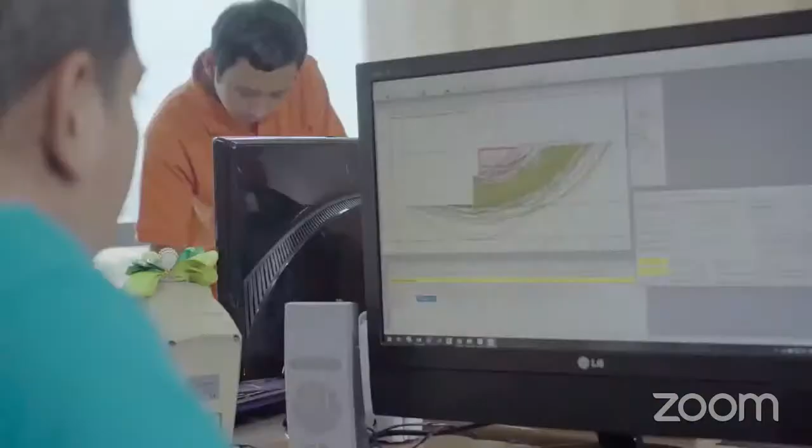Give appreciation to employees by developing their well-being. Create a safe and convenient working environment for career advancement.

Products from PT Multibangun Rekatama Patria include Tensar Stabilization Geogrids and Geogrid Triax. Geogrid Triax has been developed to interlock with aggregate particles in order to create a mechanically stabilized layer within pavements and other traffic areas.

Multi-block retaining wall system combines concrete modular blocks with Tensar uniaxial geogrids to form a specific type of mechanically stabilized earth structure, namely a modular block retaining wall.

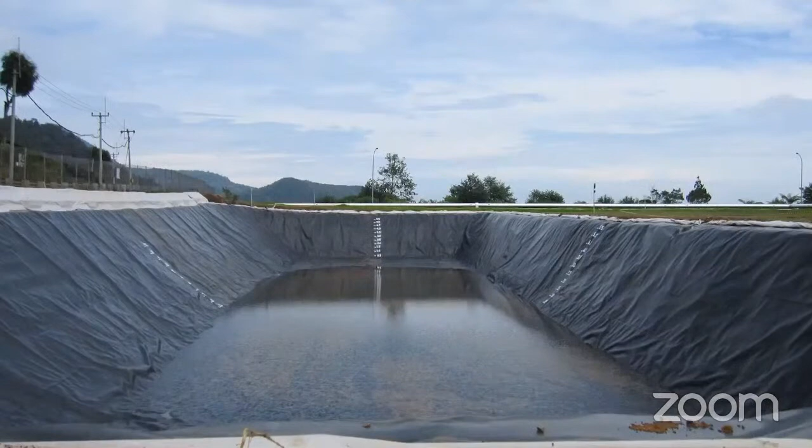Geomembrane. Geomembranes consisting of high-density polyethylene liners are used in many situations where an impermeable barrier is required, especially in extreme environmental conditions. We also provide other geosynthetic products such as geotextiles, drainage materials and composites, as well as geosynthetic clay liners, whichever provides a suitable solution for your project.

The warehouse of PT Multibangun Rekatama Patria is only 5 minutes from the Bitung Tangerang toll gate, which provides easy access for material delivery. The warehouse is located in District Integrated Area Development 2 in Bitung, Tangerang.

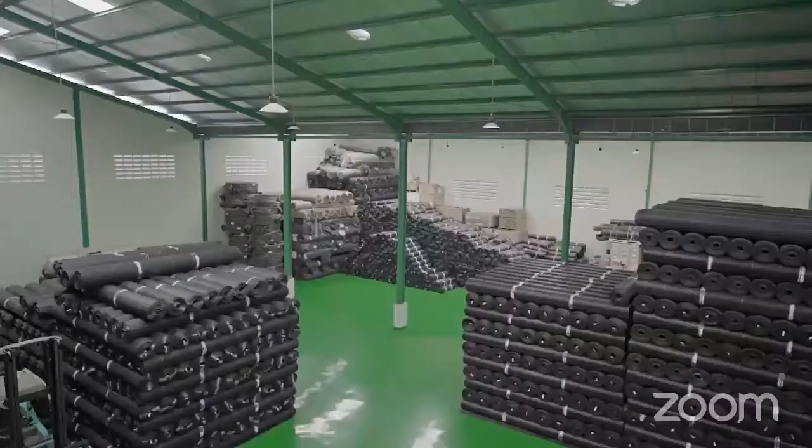It has an area of 3,300 square meters, which can accommodate the geosynthetic material in an organized and structured arrangement, using equipment operated by professional workers.

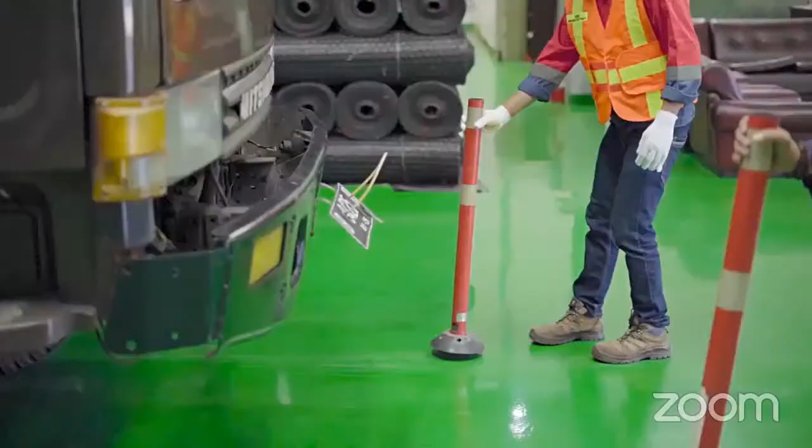We verified that the geosynthetic material quality remains intact until it reaches the project site. There is always ready stock, and professional service is our commitment. To share this professional experience, please do not hesitate to contact our team.

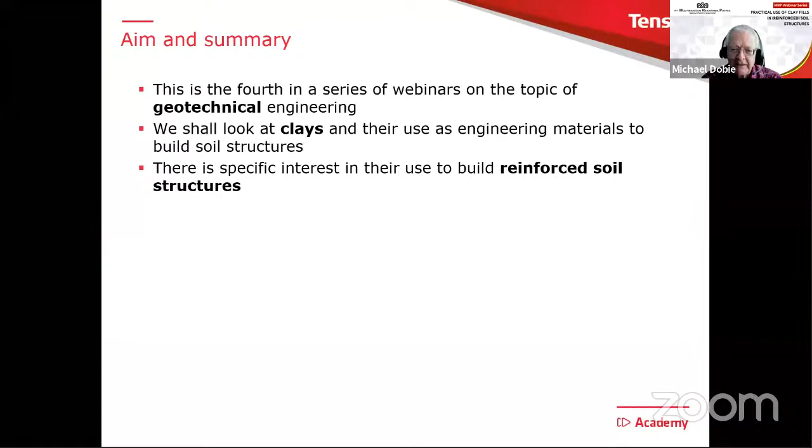This is the fourth webinar in this series, and today I've taken a topic entitled 'The Practical Use of Clay Fills in Soil Structures.' I put reinforced there as well because this is probably our main interest. But the information today could be equally applied to any use of clay fills to build, say, an embankment or a similar structure. So this is the interest today, looking at clays and their use as engineering materials, in particular for reinforced soil structures.

There will be another webinar in this series next month, where we'll have a significant change of topic, and we'll look at the use of CPTs in soft clays. So quite a different topic, and that'll be next month. So there is a list. In the first three of these webinars, we've developed ideas about soil properties in general. We've looked at measuring soil shear strength, and the principle of effective stress. I think looking at clay fills is an obvious continuation of this theme, and that's the reason for this particular topic today.

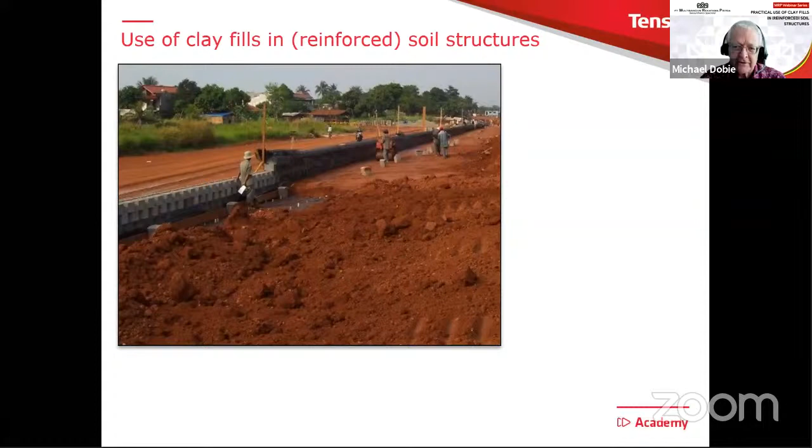So some pictures, some clay fills in action. This is actually construction of part of the Jakarta Outer Ring Road using our well-known Tanah Merah. This is a clay fill of volcanic origin material, and it forms a very good fill. One reason being that it has a predominance of a rather interesting clay mineral called halloysite, which at a microscopic level looks something like this.

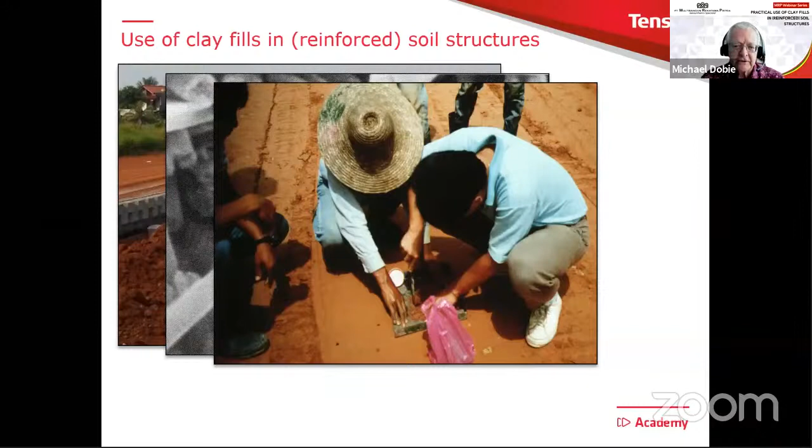But it's not the only kind of clay that gets used for this kind of construction. This is, in fact, using a weathered granite material in Malaysia to build a reinforced soil structure, and here you can see them checking density as they build up the structure.

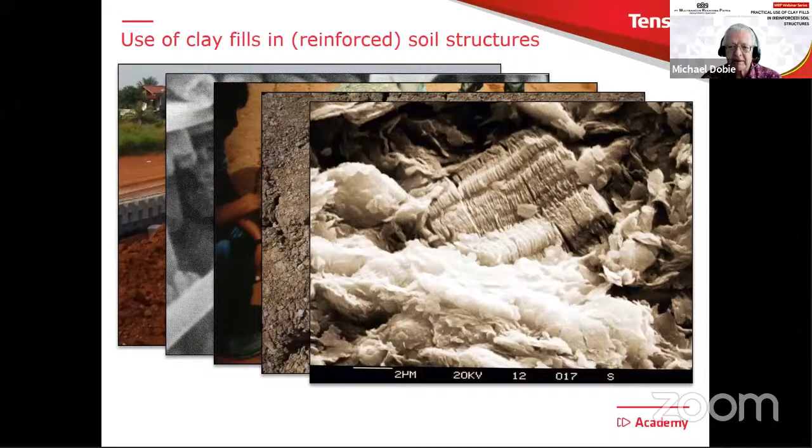What's this intended for, the webinar today?

We're going to talk initially about clay and some soil mechanics aspects of it. Then the main aim is to look at the likely pore water pressure inside a mass of clay fill after you've built it, because this is vital to understanding the appropriate drainage measures you should use when building a structure using a clay fill, whether reinforced or a general embankment.

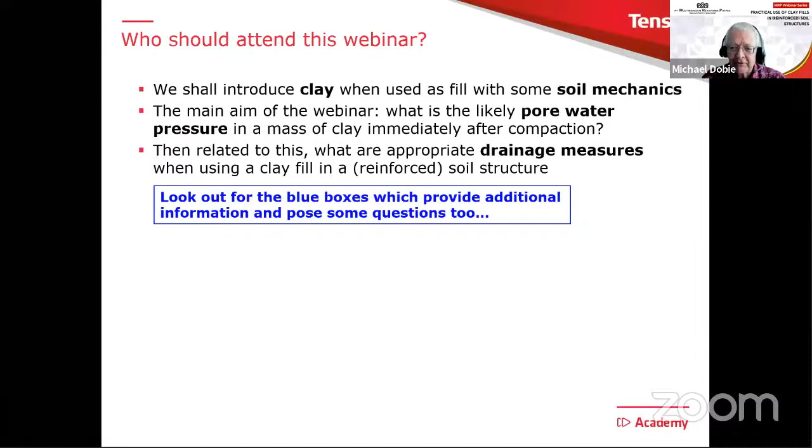This is really intended for civil engineers who have some involvement in ground engineering. That's our main target, but hopefully it will also be of interest to more experienced geotechnical engineers. The main target is reinforced soil applications, but the ideas mentioned here could be useful for a wide range of design applications where we use clay fill or other fine fills.

I also like to mention interesting books or references that could be helpful. There's one here I've had on my bookshelf for a very long time, on the left. This was a clay fills conference held in 1978 by the ICE in London, and it contains a wealth of information about the performance of clay fills. I still make use of the material in this book. No doubt there have been more conferences since then specifically on that topic, but it does contain very good information, some of which I'll be using later in this webinar.

The other book is one of Laurie Wesley's books in Bahasa Indonesia, Mekanika Tanah, the thicker one. Chapter 15 of this book specifically looks into the compaction of fills, in particular clay fills, so that's a very relevant section to today's topic.

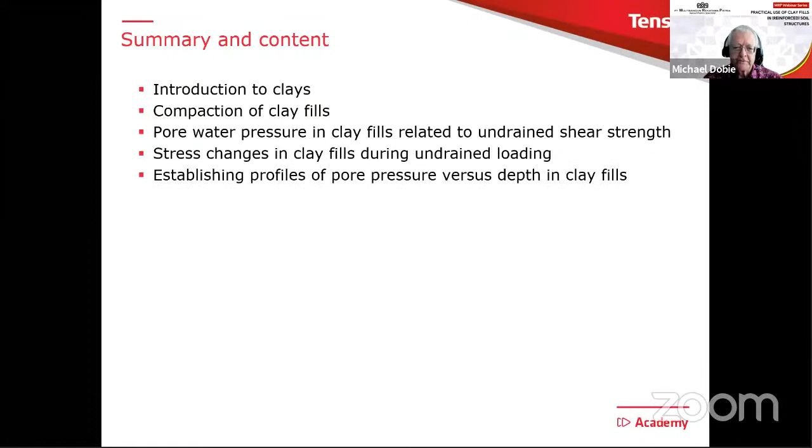So the content will be like this: a brief introduction to clays, then a bit about compaction, and the relationship between pore water pressure and undrained shear strength of a clay. This is rather important. We'll then look at stress changes in clay fills during undrained loading, an important part of the jigsaw puzzle. Then perhaps the main target is establishing profiles of pore pressure in a clay fill versus depth, because this is very useful when you try to visualize what's likely to happen as you build a clay fill and later use it in the longer term.

That will lead to important principles concerning drainage around clay fill structures, and also, just at the end, a rather nice demonstration of what can go wrong in a clay fill structure when the drainage doesn't work as intended.

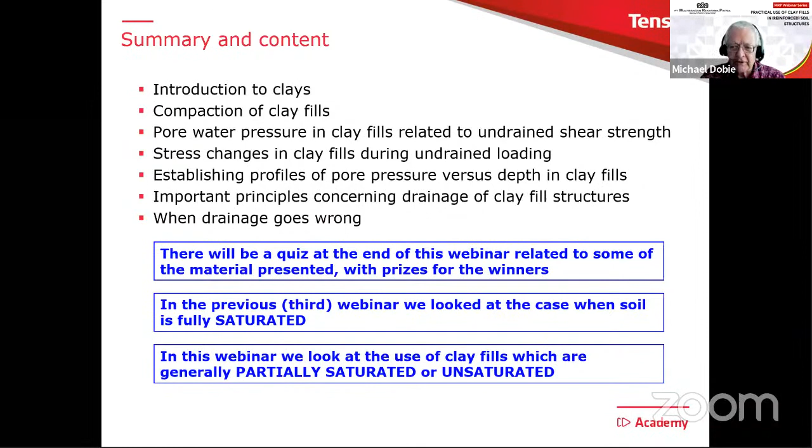Just to make a point, the third webinar we did last month was looking principally at the case of soils which were fully saturated, softer soils maybe, but soils below the water table. The main difference today is that we're now looking at clay fills, which are going to be either of two terms we commonly see: partially saturated or unsaturated. This does give some differences in behavior, and I will touch briefly on that a little bit later on.

Some introductory comments. Another nice electron micrograph of a clay. You can see there a scale bar of just 1 micron. Clay fills have many descriptions: clays, silty clays, sandy clays. But the important point is that these are materials where the mineral content is dominated by clay minerals. Clay minerals are small, generally flake-like, like the ones you can see in that picture.

These materials, especially when compacted to typical earthwork requirements, would have a very low permeability, say 1 × 10⁻¹⁰ meters per second. This is a really small number, sometimes difficult to imagine what it really means. But in the first webinar, I came up with a different way of understanding permeability. That particular permeability would mean that if you watched a particle of water traveling through 1 meter of clay under a gradient of 1, it would take 320 years. So water through a well-compacted clay travels extremely slowly.

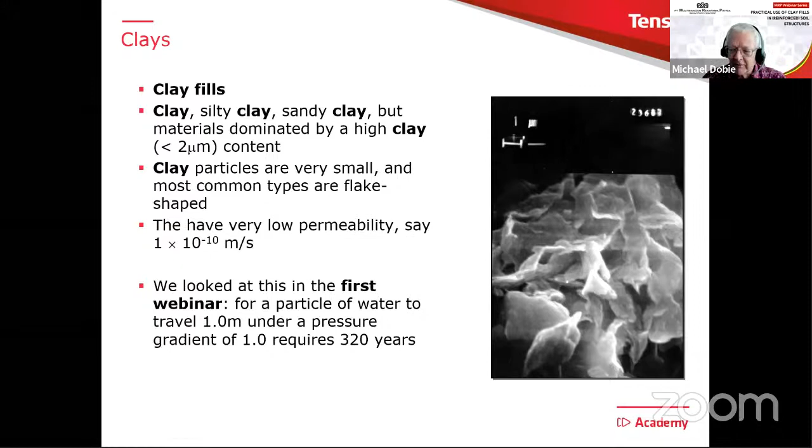Another good starting point when looking at clays and considering using one as fill would be to look at its Atterberg limits and plot them on the famous Casagrande or plasticity chart, where we plot plasticity index, the PI, against the liquid limit. This is a really useful diagram. We have a famous line called the A line, the thick inclined red line going up there, which also matches closely to the AASHTO designations of different soil types.

But what would be the important targets for clay fills? You would want them certainly on or preferably below the A line. As you go higher above the A line, you tend to get into soils more susceptible to changes in moisture content — more swelling, more shrinkage, as we saw earlier in that picture of the very cracked soil. So preferably below the A line.

However, especially with clay fills, local knowledge and experience is really important. That is something to take into account without a doubt when considering using a clay fill in a project, particularly if you're not so familiar with that area. Try to obtain some local knowledge about using the finer soils as fills.

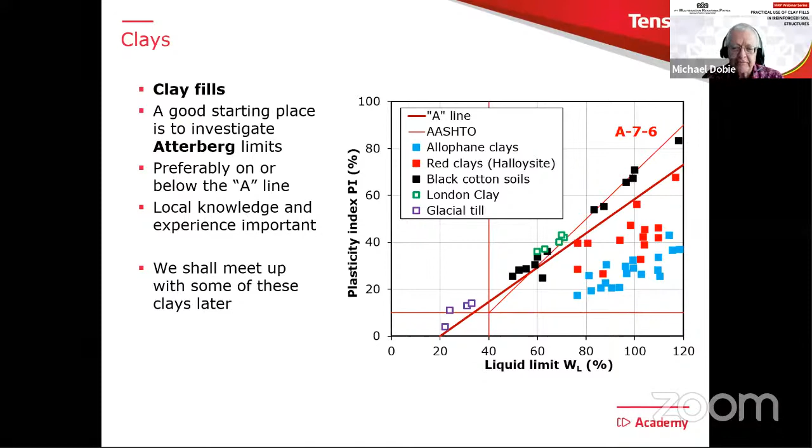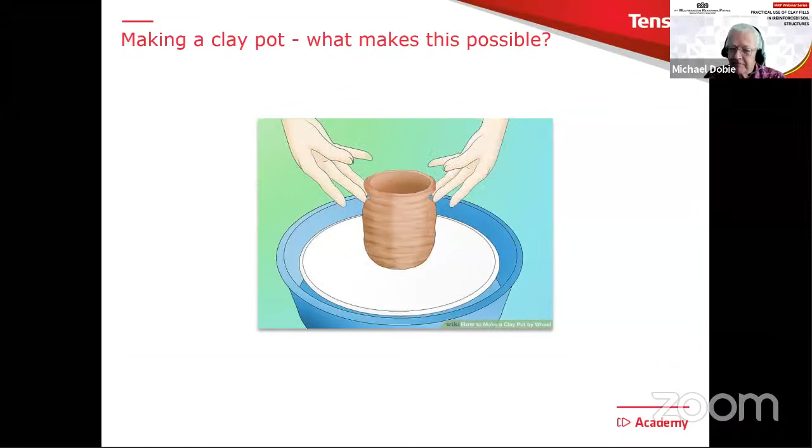So a bit of a change of view for a minute — think about something different, because I don't know if anyone listening today has ever had a chance to make a clay pot. Maybe something you did at school, but it's fun. What do you do to make a clay pot? You start with a big lump of clay, knead it into a ball, and place it on a wheel which you can spin. In the good old days you'd do it with your feet, but probably now it's electric. This would spin, and you could use your hands to create a shape as it spins round and round, maybe even create a hollow in the middle to turn it into a pot. Then perhaps make a nice shape at the top and end up with your pot, which you then remove. And of course, you then put it into a kiln.

I think probably the answer to this is much the same as the answer to the next question, because the next question will now move to civil engineering and look at a case like this where we have a construction site and that's a clay fill. It's actually in the west of Java. You can see that this clay fill is supporting extremely heavy compaction plant. Well, how can it do that? There must be something going on that allows it to do that.

So I thought it would be useful to do a bit of soil mechanics at this stage. During the last webinar, I set a bit of a challenge to see if people could derive a particular relationship where we can predict the undrained shear strength based on the drained strength properties, or the effective stress properties.

C' and phi', which we have to do by using the geometry of the Mohr diagram. If we do this, we end up with this expression where you can see undrained shear strength on the left equals quite a number of terms, but they're all very familiar. You need to know two things here to use it, K0 and AF. AF is the Skempton pore pressure parameter relating change in water pressure to change in shear stress.

And the challenge was, can you derive this from first principles? I'm pleased to say, yes, James Oetomo did this. He sent in his derivation, and it was perfectly correct. He received as a prize the book Mekanika Tanah by Laurie Wesley. That was the shorter book. Congratulations to James on doing that.

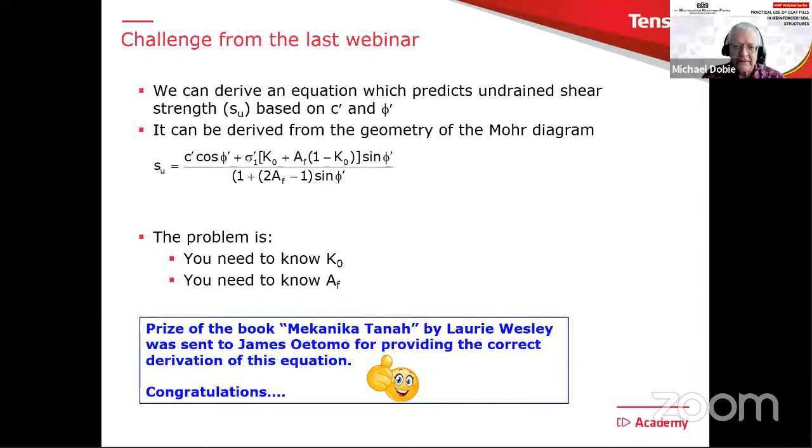But I want to use that expression now. So what I'm going to do is go back to our site and consider a depth, say 0.2 of a meter below that very heavy vehicle or that very heavy plant. Let's assume for the time being that our water table, or phreatic surface, is actually at ground level, which means the clay would be saturated. With all that information, and making some assumptions about the soil properties, typical clay properties, I'm assuming a K0 of 1 and an AF of 0, which would probably be quite reasonable for that material we saw just now.

If I put all of that information into that expression, then the undrained shear strength comes out at 5 kilopascals. Now, if you're familiar with what those numbers mean, you'll know that's an extremely soft clay. Almost certainly you could not walk on it, and certainly if you tried to place and compact a clay with an undrained shear strength of 5 kilopascals, it would not be possible.

So perhaps to understand this better, let's now turn to typical compaction requirements that we might be using, especially when it comes to using clay fills. The normal starting point is a compaction curve. This is something we normally derive from doing what's called the Proctor test, and we develop a relationship between dry density of a soil and its water content for a particular amount of compactive effort. The red line would be the result, a series of plotted points.

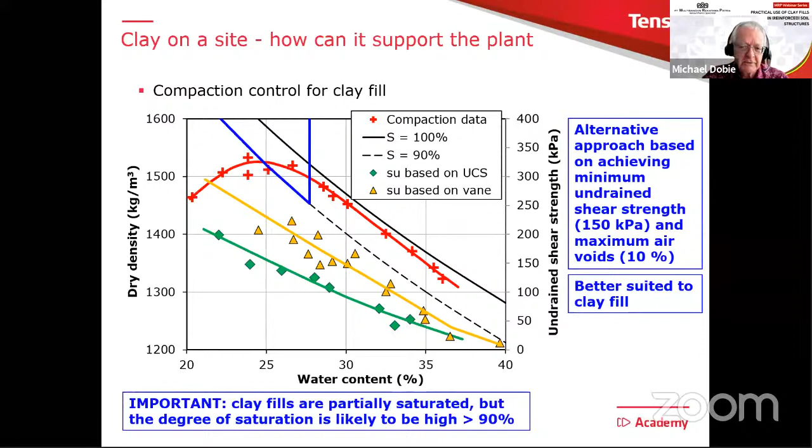So what I want to do now is to take that concept of partial saturation and see how a material behaves when we load it in the undrained condition.

But before we get there, I'm just going to go back a little bit to the third webinar from last month, because I went through this procedure for a saturated soil. If you attended that webinar, we looked at a case where we have a soil element below a water table underneath an embankment.

We wanted to understand what happens when we apply a total stress to that soil element without drainage taking place. The way I did this was to isolate the little element and have a very close look at it like this. To make it a bit easier, we enlarged it like that, and then looked inside this element to try to understand what would go on.

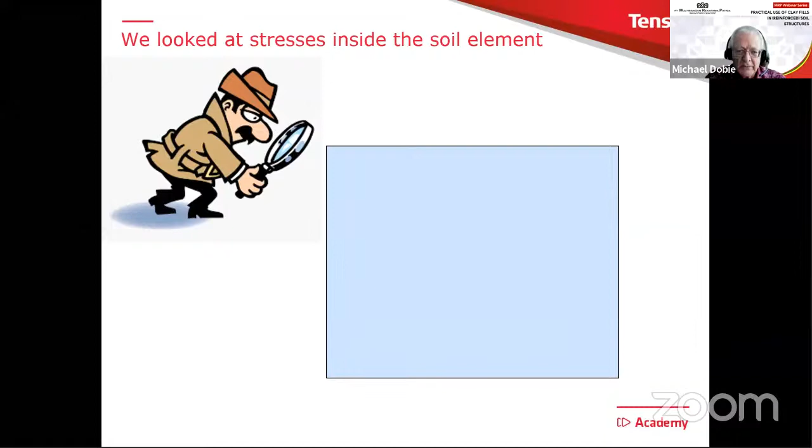Now, it was quite a long description, so I've just taken part of it. What we're looking at here is a box, and in this box, the top can move up and down. The brown lumps are the soil particles, and of course, the blue is the pore water. If it's fully saturated, then it's all blue.

And we then looked at the case of applying a load to it. Before I get there, just to mention, we also have on the right-hand side a gauge to measure pore pressure, the U, and we also have a tap. Today we're going to keep the tap closed because we only want to look at undrained behavior. So if the tap is closed and nothing can leave the system, then this would be the undrained condition.

Above the box, I've written the principal effective stress equation, saying that total stress equals a combination of the effective stress, that's the intergranular stress, plus the pore pressure, that's the pressure within the pore spaces, in this case in the water. So we're going to apply a load, sigma, on the top, or a stress.

And then the question is, well, what happens when we do that? We need to restrain the sides to prevent the box from breaking open, so we apply K times sigma there.

And then the question we asked, this is the same as last month, is if we do this, then what's U? What is delta V, that's the change in volume? And what is K, that's the proportion of sigma required to prevent the box from splitting open?

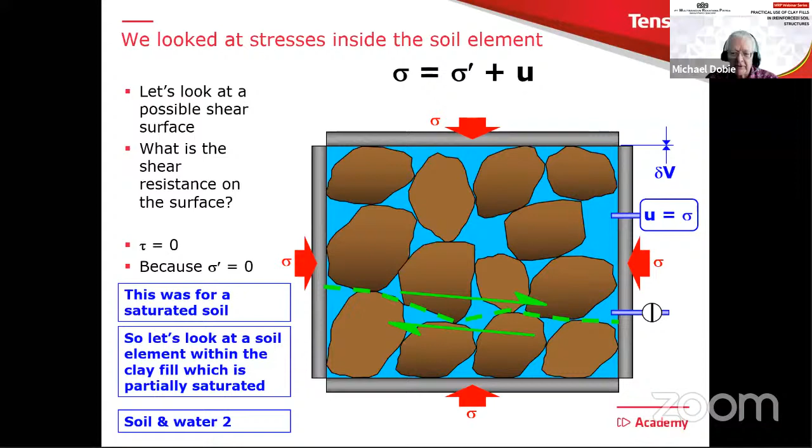Okay, so now let's leave that discussion behind, because that was for saturated soil, and move on to today's topic. What we want to do now is look at the soil element, in this case the clay fill, which is partially saturated. So if we go back to our picture, we're now interested in the particle of clay, or that element of clay inside the clay fill embankment, which we know is going to be partially saturated.

So again, we'll isolate it and have a close look at it. Before we add the soil, let's think about what happens to the pore fluid itself. I'm going to take my test box and fill it up with water, but this water has air bubbles in it. That's the little white things, they're air bubbles. And because of the presence of the air, I'm going to call it a fluid now because it's a combination of a liquid and an air bubble. So it makes the fluid compressible, which means that delta V over sigma is going to be something greater than 0, whereas in the saturated case it would have been incompressible.

So I'm going to apply a stress. I'm going to have to hold the box at the sides to prevent it from splitting open again. And the question again is, when I do this, what is U, what's delta V, and what is K in this particular case? And the answers are going to be like this: U will again be equal to sigma. But delta V, if I just do it again, you see delta V is something greater than 0 now because the system is compressible. And K will again be equal to 1.

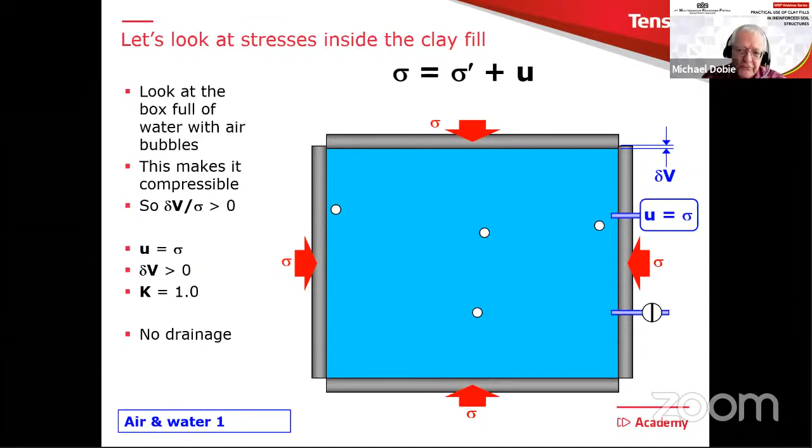And just to remind you, in this case we're still looking at the situation of no drainage. So this means that we now have a pore fluid which is compressible. One thing also to note about this system is that when we get that reduction in the volume of the air bubbles, it's partly caused by air going into solution. And if we increase the pressure more and more, then more and more of the air dissolves. And in fact, eventually, if we go to a very high pressure, the air dissolves completely. In other words, it's no longer present as free air, and we then return to the fully saturated condition. That would be at high pressures.

So I'm now going to put the whole system together. We now have the three elements of the soil: we have the solid particles, which are incompressible, but the soil skeleton itself, that's the assembly of soil particles, is compressible. And so now is the pore fluid, which is compressible because it's a combination of water and air bubbles. Now, at the moment, with no shear, no normal stress applied, no external stress, what's the shear resistance here? Well, of course, it's currently 0 because there is no stress being applied.

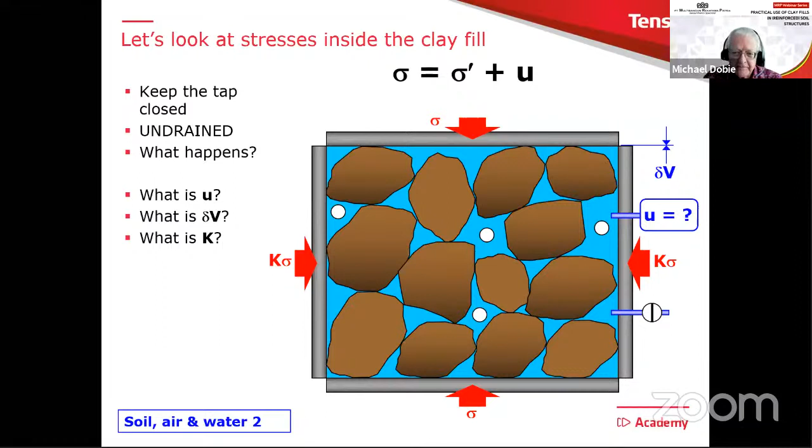So we're now going to repeat what we did for the saturated case. We're going to apply sigma, remembering all the time that this is undrained. I'm never going to open the tap in this discussion today. So it's undrained and we apply sigma. Question is, what happens? We have to hold in the sides of the boxes. What is U? What's delta V? And what is K? And also, what is the effective stress? The answers are going to be like this.

Now, as I allow that sigma to be applied, I'll do it one more time, you will see that there is a small reduction in volume. That's happened because we have a compressible soil skeleton and a compressible pore fluid. Because they're both compressible, the whole thing can compress, even though it's undrained. You'll also notice I made the little air bubbles become smaller. This means that U is now going to be something greater than 0, but less than sigma. Delta V will be something greater than 0. K is going to be K, it'll depend on the soil properties.

We see that there is a small effective stress generated because there is compression of the soil skeleton. Then sigma dashed is something greater than zero. And of course, the important principal effective stress equation says that the effective stress is the total stress minus U. This means that if we look at that possible shear surface, we find that there is resistance developed there.

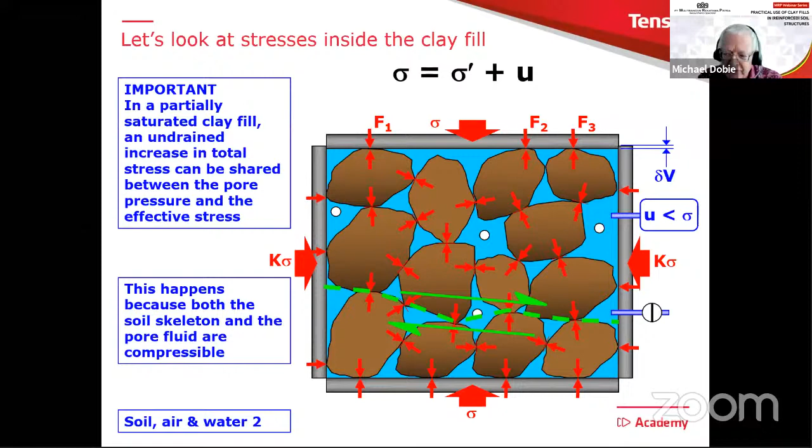So the shear resistance created by the undrained increase in external total stress happens because the effective stress is greater than zero. An important conclusion from this is that in partially saturated clay fill, an undrained increase in total stress can be shared between the pore pressure and the effective stress. This happens because both the soil skeleton and the pore fluid are compressible, and this is an important difference compared to saturated soils.

Now I want to get another clue towards looking at the relationship between undrained shear strength and the pore pressure in the soil sample. To do this, I'm going to look at an unconfined compression test. This is a very simple test - I'm sure you're all familiar with it. You simply put your sample of clay into a machine and load it until it fails.

What's nice about this test is that the piece of soil you can see there in the machine could just be a lump of soil ready to be compacted into your project, into your clay fill. I'm going to look at some results published in a very famous paper by Bishop and Bjerrum in 1960, where they present results from an unconfined test on remolded London clay with the properties you can see there. And here's the result.

So we have strain in the horizontal direction, and the green dots show the increase in deviator stress until the sample fails. It fails at about 68 kilopascals, so that means the undrained shear strength is half of that, about 34.

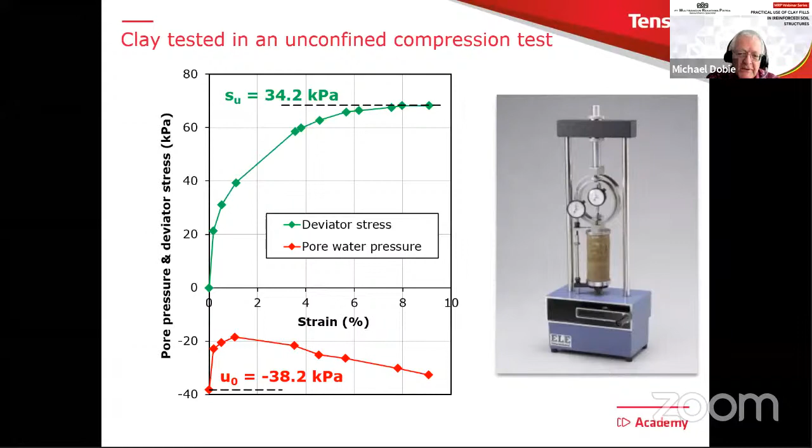But what's also rather nice in this test is that they arranged it almost certainly inside a full triaxial apparatus, so that they could also measure the pore pressure. When we look at the pore pressure response, we see that it starts off at almost minus 40 kilopascals. It then becomes a bit higher, and then it drops off again. So we can see that the pore pressure inside that sample is negative.

So although the clay is soft, with undrained shear strength only 34 kilopascals, in order to create that undrained shear strength it was necessary for there to be an initial pore pressure of minus 38.2 kilopascals - that is to say, a suction. That suction was required to create that particular undrained shear strength. So even though the clay is soft, it's in a state of suction.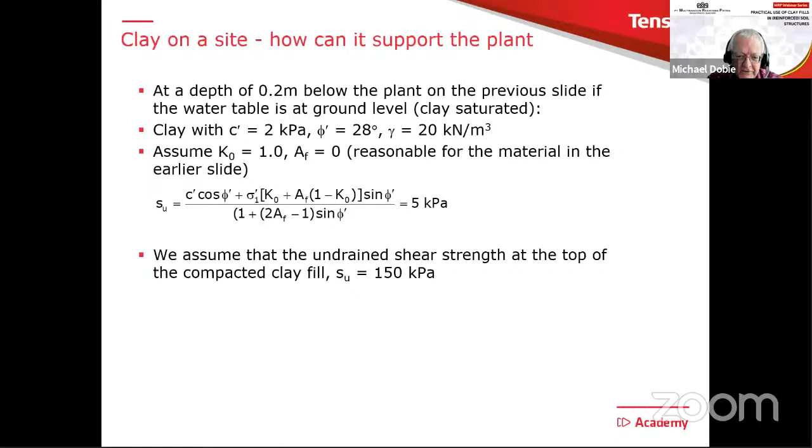So what I'm going to do now is use my formula, and I want to get SU, undrained shear strength, to become 150 kilopascals. To do that, if you look at that formula, everything is fixed except the effective stress, sigma 1 dash - that's the vertical effective stress at that point in the clay. The total stress is also fixed; at that depth the total stress is 4 kilopascals. Therefore, the only thing that can be changed to reach that undrained shear strength is the pore pressure.

And in fact, we need to make the pore pressure minus 162 kilopascals to achieve that undrained shear strength. In other words, it's a very high suction, and that's what's going to be present in that clay. That's the reason why that clay can hold up that very heavy machine, because of this high suction. It's also the reason why the potter can make his pots.

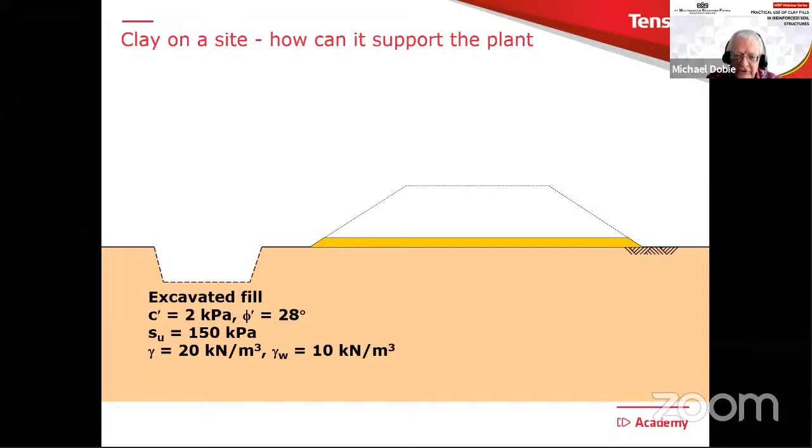So if we try and imagine what's going on at that site: there is our initial situation, and we're going to excavate the fill from a borrow pit. We have those properties we mentioned earlier on. So we dig it out and we start to place it, and we run a compactor up and down there, and we look at that particular element just now.

What we found was that it had a total vertical overburden stress of 4 kilopascals at 0.2 of a meter, and the pore pressure was minus 162, which is a suction. So that was when we first placed that layer.

What happens as we build up the fill higher and higher? We're going to build this fill to something over 10 meters. In doing that, there will probably be a bit of an increase in the undrained shear strength for the reasons I mentioned, so maybe it's a bit higher than 150 now.

In this situation, I can use our formula again to look at the stresses and pore pressure in that element. The total overburden stress is now 204 kilopascals because it's 10.2 meters high, and we find that the pore pressure has just become positive, at 21 kilopascals. So you can see how the pore pressure has changed due to the undrained application of the load above the soil element.

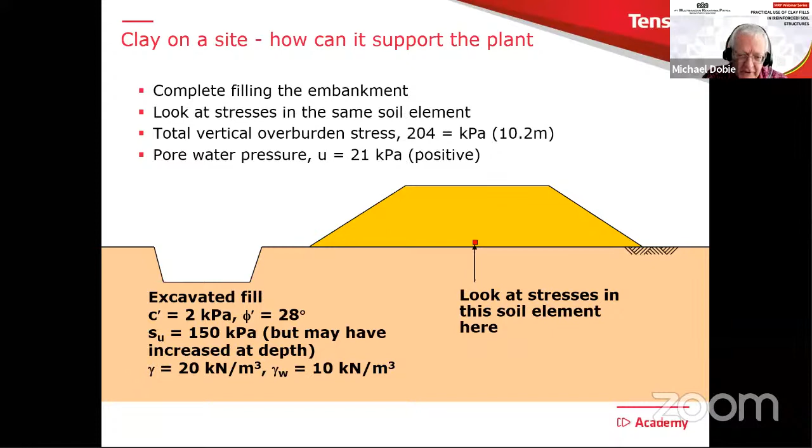A nice way to summarize this kind of data is on a diagram like this, where we plot the pore water pressure along the horizontal axis, with 0 in the middle going negative to the left and positive to the right. The vertical axis is the total vertical stress, which we can calculate as the height times the unit weight.

If we assume a unit weight of around 20 kilonewtons per cubic meter for well-compacted clay, we can add an axis, and we can also calculate a pore pressure ratio, RU, which is simply the ratio of pore pressure to total vertical stress. I can plot lines of RU value like this, and you can see RU is positive on the right-hand side, while because pore pressure is negative on the left, the RU values go negative there.

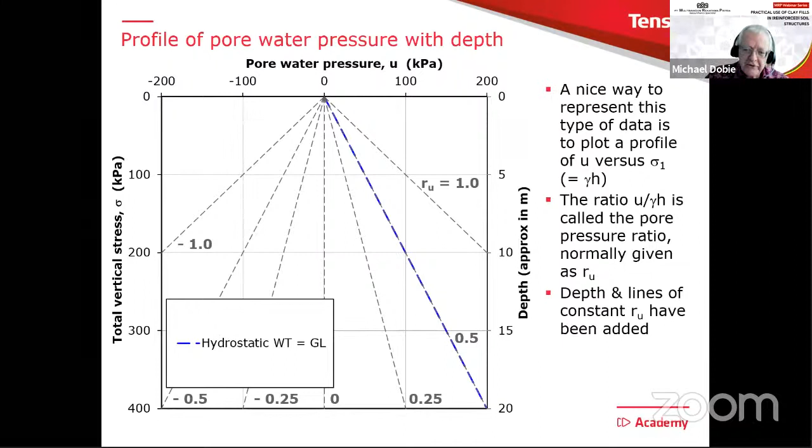The thick blue dotted line would be a typical value of RU when we have a hydrostatic water table condition, in other words the water table at ground level, which we assumed at the beginning of our exercise.

So now I'll add the two dots we just calculated. The red one was when we first compacted the clay fill, and the blue dot is when the fill reaches a height of 10.5 meters. You can see how we've just gone into positive pore pressure at the blue dot, as we calculated just now.

I can also add my original calculation where I found that very low undrained shear strength - that's the purple dot up near the 0. And I can add the data from the Bishop and Bjerrum test, which is the green dot.

I can also add to this diagram the undrained shear strength applying in each of those cases. What you can see is that at very shallow depth, as you move to the left on this diagram - in other words as your suction becomes higher and higher - your undrained shear strength also becomes higher. That's what we'd expect to see when compacting a clay fill.

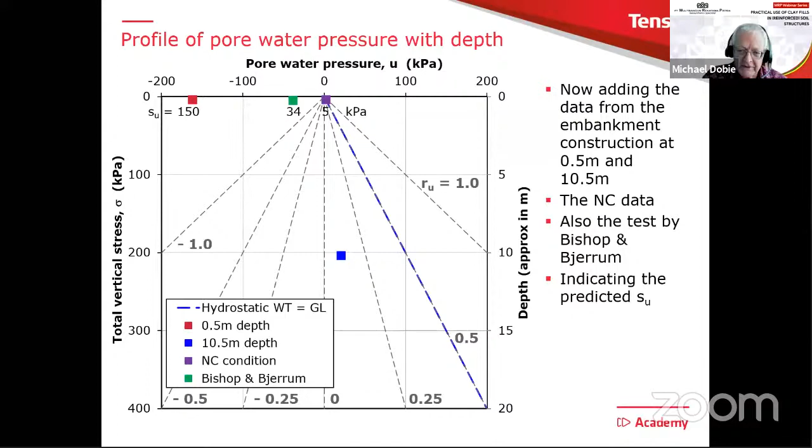Now that was a bit theoretical, so I want to look at some real data using that same diagram, reminding ourselves that clays are partially saturated. I'll show you just a small sample, mainly from that clay fills conference I published in 1978, but you can find lots more data of this type - some laboratory testing and some measurements from site.

Same diagram, so I don't need to explain that again, but in this case those four lines are all derived from laboratory testing on a UK clay called the Lias clay, which is a reasonably plastic clay. A number of samples have been recompacted to achieve a certain undrained shear strength in the laboratory, and then a test is done to look at the relationship between the vertical stress and the pore pressure - you can see the nature of that curve.

The curve is heading up, so if you imagine going down to very, very small total vertical stresses, you would get very high suctions in those samples. We also see that generally, as the undrained shear strength increases at any particular total vertical stress, the pore pressure reduces.

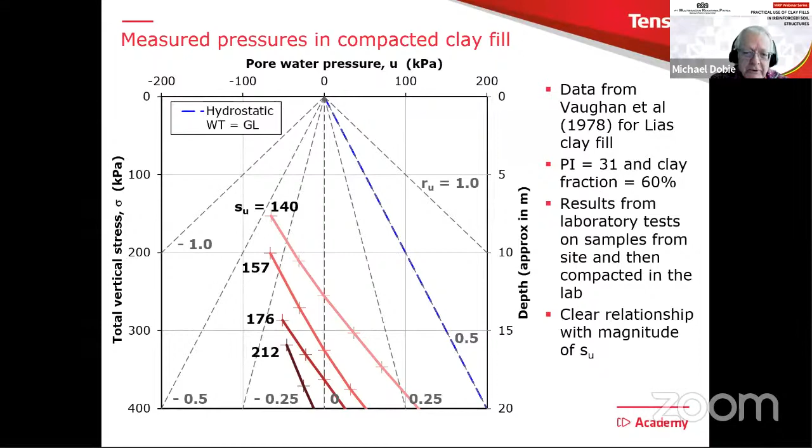The last of these examples is a highway embankment, a very typical one, 12 meters high, again in the UK, built from London clay, quite plastic. Unfortunately, in this case, the undrained shear strength was not reported, but the clay was generally placed on the wet side. So perhaps the undrained shear strength is lower than the 150 kilopascals we identified earlier on.

This picture is a very good demonstration of what's going to happen in a moderately high fill, in this case built with a slightly wet clay, when it comes to pore pressure and its change with time. So if I plot that information for end of construction on this diagram, it'll look like that. Again you see that basic trend: as your total vertical stress becomes smaller, your pore water pressure becomes more and more negative. That's the same trend of behavior we've seen earlier on.

So to summarize in this picture, there is our 12-meter high clay fill. The upper two-thirds is in a state of suction, and the lower one-third has a positive pore pressure because of the effect of undrained loading of that clay. And of course, that is dissipating towards the basal drain. So later on, when we talk about the importance of drainage when using clay fills, this is a very useful diagram to remember, because you need to take that into account when planning and designing drainage systems for clay fills.

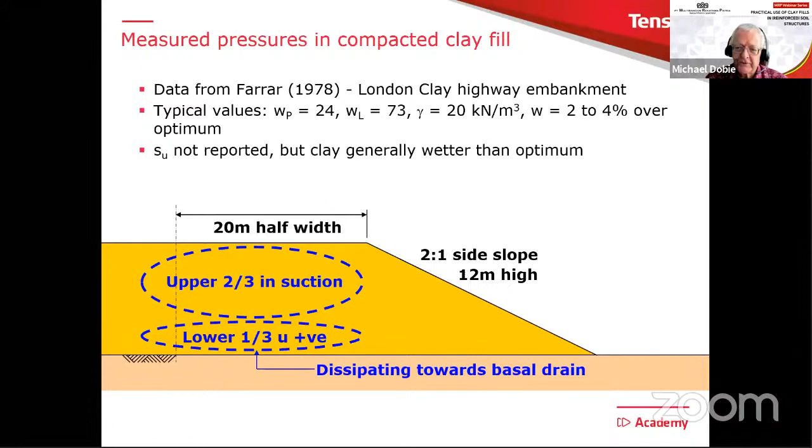So what are the conclusions so far? We have seen that a well-compacted clay fill, certainly to typical highway specifications, is likely to be in a state of suction to a considerable height, say at least 10, maybe 12 meters. In that last case, the clay was rather on the wet side, according to the paper. And it's only going to be at the base of high fills, in excess of those values, that you're likely to get generation of positive pore pressures.

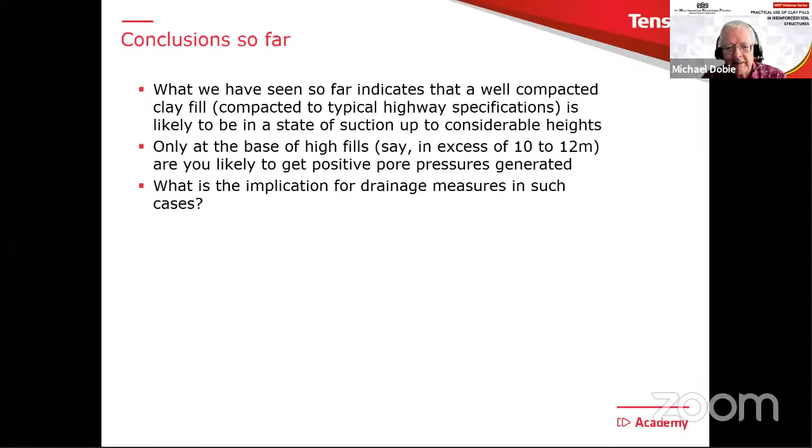So what's the implication of this when it comes to drainage measures? This is really perhaps the main target of this talk today: how you would go about designing or laying out drainage when you're using a clay fill.

So to do this, I'm going to introduce you to a gentleman here whose name is Clay. In fact, here in Indonesia, we'll call him Pak Clay, all right? This guy, Pak Clay, is in a permanent state of suction. You can see him there - he's got this drinking straw, and whenever you put Pak Clay's straw into free water, the water will travel from where it is into the clay, in any direction - uphill, downhill, any direction - because clay is always in a state of suction. And he prefers to be that way, because once the water goes into the clay, he will swell and soften. He doesn't want to do that - he doesn't like swelling and softening.

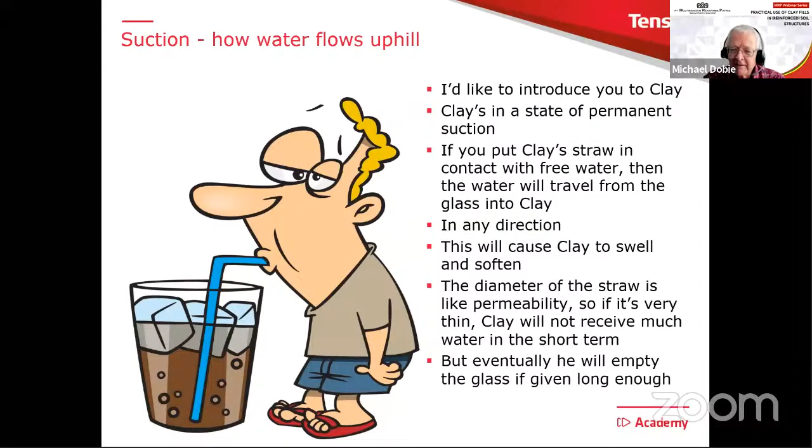He wants to remain in his state of high suction. The diameter of the straw matters because it's like permeability. If the straw is very thin, then in the short term, clay won't receive much water, but he will still receive some. And if we leave it there long enough, it would eventually empty the glass. That's a bit like the situation when we're trying to plan drainage in contact with clay fills.

So we have a little message coming from clay here. He says, look, based on this, please could you minimize my exposure to free water, because I don't like it. That's what is worth thinking about when we talk about drainage.

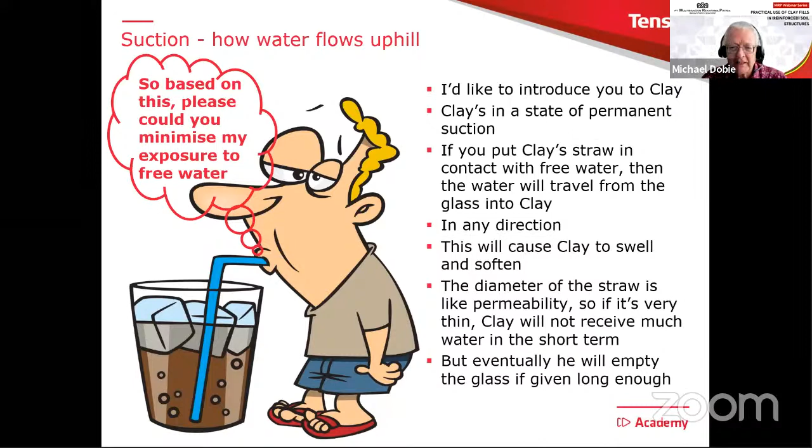Now let's look at the same cross section and correct the errors. First, we'd like to have a nice big drain adequate to carry any likely surface water flows. We seal the facing drain, the granular layer behind the modular blocks, from the surface. We don't want surface water running into that drain.

We want to have high-strength mechanical connections, just in case there is some swelling, so it can be resisted by the connection. And the basal drain is far more effective if placed at a level where it can easily drain to the outside, into say a drain at the toe. You can even consider putting in slotted pipes, maybe wrapped in a geotextile, to help encourage that drain to remain empty. These details are really quite important when it comes to drainage for clay fills.

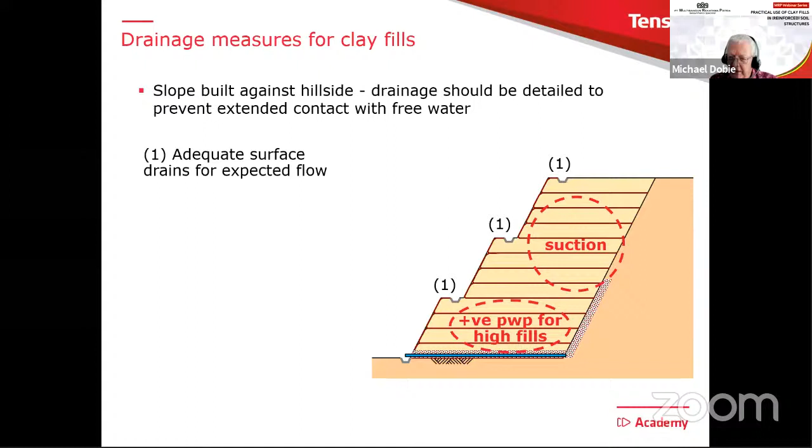If we look at a more general case of perhaps a higher fill built up against a hillside where there might be some internal water flows, the principles are much the same, but there are a few other things to think about. We expect the upper part of that fill to be in a state of suction, and the lower part could become positive if the fill is very high. We might also have some internal flows. But the first thing is we want to design surface water drainage adequate to intercept any surface water flows, with crossfalls and so forth, to make sure water is taken away and doesn't stand there for long periods, which would otherwise infiltrate the clay fill.

If you have internal water flows, it's best to intercept them with a gravel drain at the back and base of the reinforced soil structure. That would be a very important detail, again possibly with an exit pipe to make sure that drainage layer remains empty.

Also, when you have a gravel drain at the back of the reinforced soil block or compacted fill, it should not daylight. It's a common mistake you'll see - people often put these drains coming out at the top. If you do that, surface water can nicely run down that drain and come out at the bottom, giving another big potential for the clay fill to absorb water and soften, which you don't want to happen.

Also important that internal drains should be arranged to remain empty. You don't want them sitting there full of water. Just remember our friend Clay and what he asked - he said please don't put me in contact in the long term with free water. So these are some of the principles which I feel are very important when designing drainage in conjunction with clay fills.

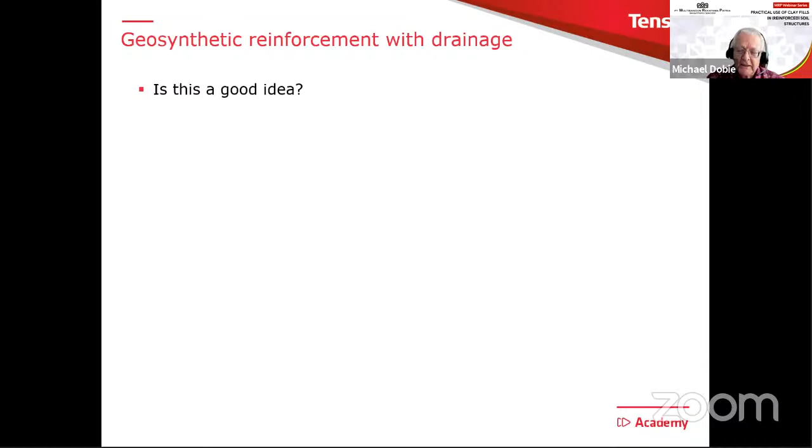Now, there are forms of geosynthetic which combine reinforcement and drainage. Is this a good idea? I'd have to say, as with any engineering material and decision, it depends on the design situation.

But in a simple way, if a mass of clay is in a state of suction, then the only possible result of including thin drainage layers throughout that clay would be to provide a path for water to enter the fill. And if it did that, this could cause swelling and softening. It's something I often ask people to think about - remember that when you create a drainage detail designed to let water out of a system, if things go wrong, it could let water go into the system, which you don't want. So just think carefully about that.

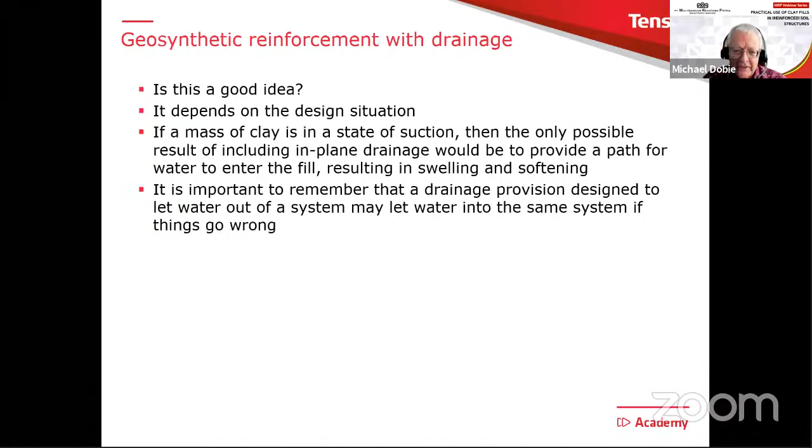The last thing I'm going to cover today is an example from a project in the UK on the London orbital motorway, the M25, where an interesting failure took place. Let's try to understand what happened. I was actually involved in investigating this failure, so I had some first-hand experience, and the photographs we're going to see were taken by me at the time.

There is a very detailed report about this published a long time ago in the proceedings of the ICE, and particularly important, there was an extensive discussion. If you really want to learn a lot about this, the discussion is probably almost more important than the original paper - it was 24 pages of it. Very important document. The failure occurred in June of 1981.

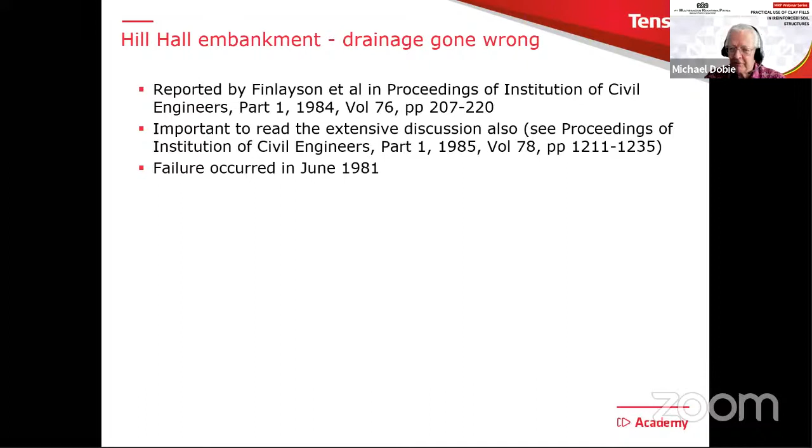I've already mentioned it was on the M25. There, without a doubt, there were some very important lessons learned, especially concerning drainage blankets and the importance of avoiding creating a water source in contact with a compacted clay fill. Just think about our friend clay again, our compacted clay. So let's have a look and see what happened.

The site was like this - we're looking along the center line of the highway. In this particular part of the site, there was a slight crossfall from left to right. So what they did, they placed the drainage blanket directly on top of the topsoil and the grass.

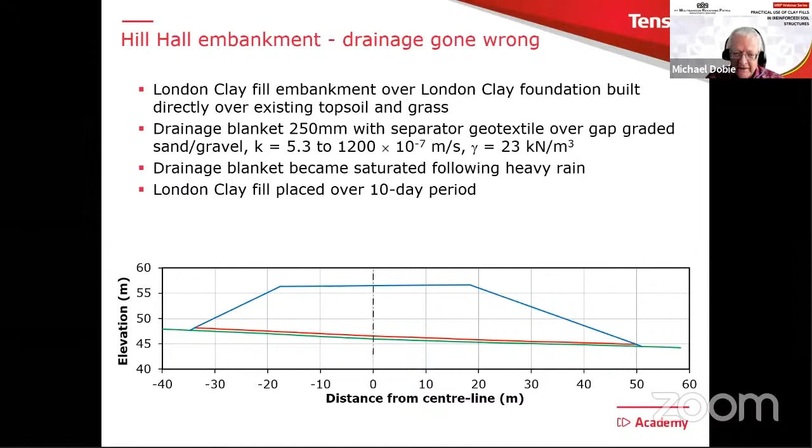In this case, the drainage blanket was not actually that high permeability, if you look at the numbers. Almost certainly as it sat there, it became saturated with rain. Then, as is often the case with earthworks, the contractor suddenly got very busy, and managed to place all of that London clay fill in a 10-day period. At the highest point, it's something like 12 meters high - a huge amount of clay placed extremely quickly.

Unfortunately, within a short time after completion, it starts to fail. First of all it was noticed straight away, but just 2 or so days after the first cracks appeared, the toe had moved out by about 3 meters. Because this was a rather serious situation which no one really expected, a significant investigation was carried out, which included building a small trial embankment, which we'll look at in a minute.

So here's one of my photographs. When I first arrived at the site, you can see very clearly there the failure. Investigations had just started.

There's already someone doing a borehole up there somewhere. The usual kind of thing that goes on in these cases.

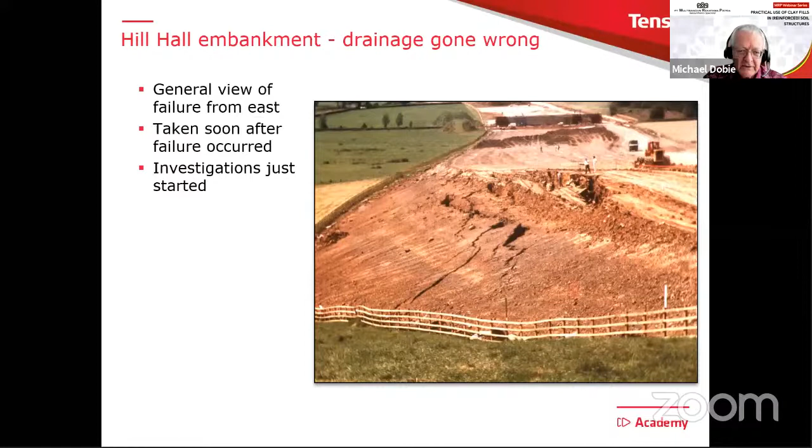You can see how the toe of the embankment has broken down the fence at the edge, which means the embankment is now moving into the property of the farmer on the left-hand side. So he'd be very happy that that's happening.

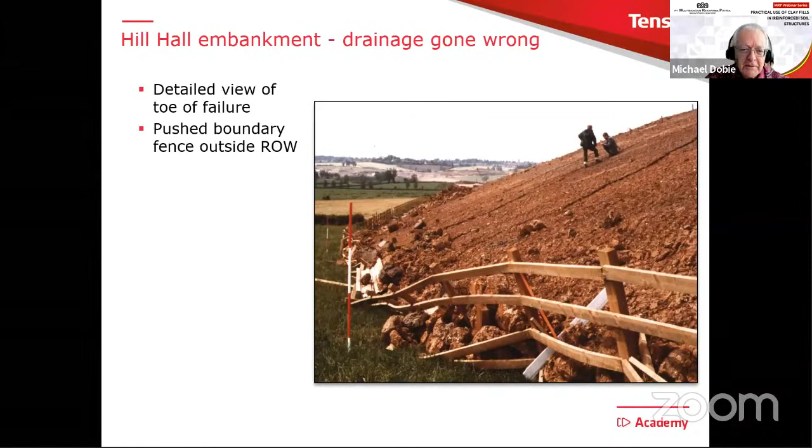What was rather nice here, and I've shown this picture many times because it's just so interesting, is that a little trench was dug into the toe of the embankment, but possibly by mistake it was dug at a slight angle, which meant you could start to see the appearance of the sliding surface between the clay above, and in this case you can see the drainage blanket material at the bottom.

Clearly this required some thinking about what should happen. So it was important to understand the pore pressures and what happened with the drainage blanket.

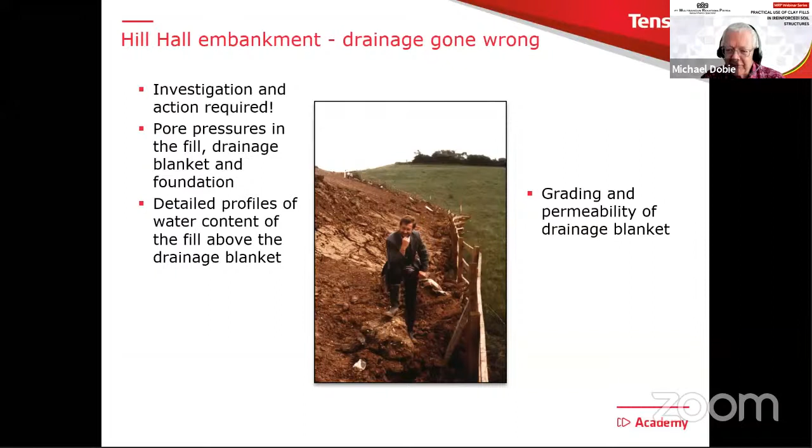One thing that was done: some very detailed profiles of water content were made, literally taking samples at very small spacings, just millimeters above the drainage blanket, to look at the distribution of water content. A careful look was also made at the grading and permeability of the drainage blanket.

Nearby there was an existing section of embankment which had only reached 4 meters high. It was decided to install some piezometers into this and then place another 4 meters of fill very quickly. This was referred to as the trial embankment. It looked like this.

There was this existing section of embankment, 4 meters high, and they placed these piezometers - there are 3 of them shown there. In this case you've got P8 in the bottom of the fill, P7 is in the drainage blanket, and P6 is in the top of the foundation soil, which is also London clay.

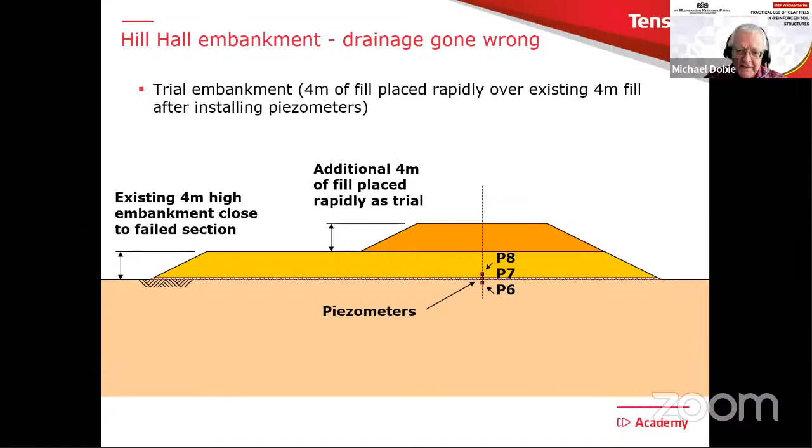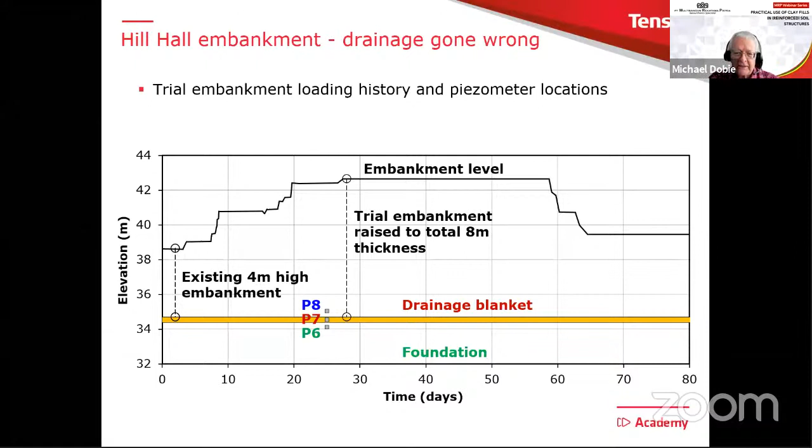So what I'm going to do now is superimpose on this diagram the pore pressure responses in P8, P7, and P6. And they look like this.

It's worth just studying this diagram, because as you start to look at it, it doesn't seem to be right. P7, the colors match - P7 is the brown color, that's the piezometer in the drainage blanket, and it has the highest pore pressure. The pore pressure reaches that height - it's an elevation.

Whereas at the top of the foundation soil, the green line has a slightly lower pressure. But the weird thing is that towards the bottom of the fill we have a negative pore pressure, because of course this was London clay, built to very good specification of achieving an undrained shear strength, and it had a high suction in it. That's what we're seeing in the piezometers.

So it's a bit difficult. The obvious question is, well, why wasn't the drainage blanket at 0? Why wasn't it empty? Well, it was very, very wide and of a rather low permeability, and it really wasn't working very well. You can see it does slowly dissipate - the brown line does start to go down, but it does it slowly.

So let's go back to the cross section. There it is - you can see the sort of information they got from measuring the profile of water content.

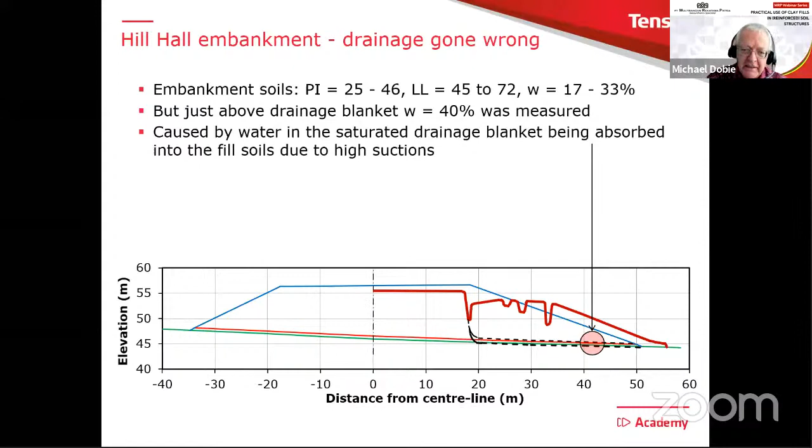Normally, water content was something between 17 and 33%, but just above the drainage blanket had softened a lot, and it was 40% or more at those elevations. So what was going on was that the high suction in the base of the fill was absorbing water into the base of the clay, contributing to the problem which took place.

So what happened - and this is mainly or partly my own kind of picture of what probably happened - is that we have a foundation soil, the field lying there, and probably the top of the foundation soil would have low suction values before construction started. Then this rather low permeability drainage blanket was placed, sat there for quite a long time in heavy rain, and it got saturated. So the pore pressure was currently 0 before any fill was placed.

Then the fill is built very quickly and with very high suctions over the top. What happens is that the drainage blanket, with its high pore pressure, provides water to the base of the clay fill. When it softens sufficiently, the strength reduces enough, even on that very gentle slope, to create a failure. The failure took place either just above or below the drainage blanket, either in the base of the fill or the top of the foundation.

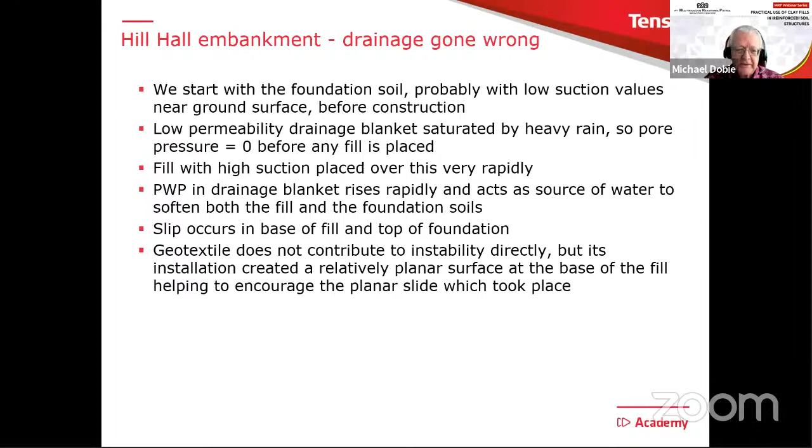There was a geotextile separator placed above the granular layer. It didn't by itself contribute to the failure, but the problem was it gave a rather planar surface, making it easier for that sliding to take place.

So I've come to the end now. We've covered quite a lot of information, but just to remind ourselves about a few things: in a well-compacted clay fill built to typical highway specifications, the clay is going to be in a state of suction to considerable heights.

Very high fills may generate positive pore pressure at the base of the fill. However, typical highway embankments generally don't reach those heights so often. These suctions provide an additional safety factor which we don't normally take into account in our calculations. It's a kind of bonus, but because it's there, we don't want to lose it.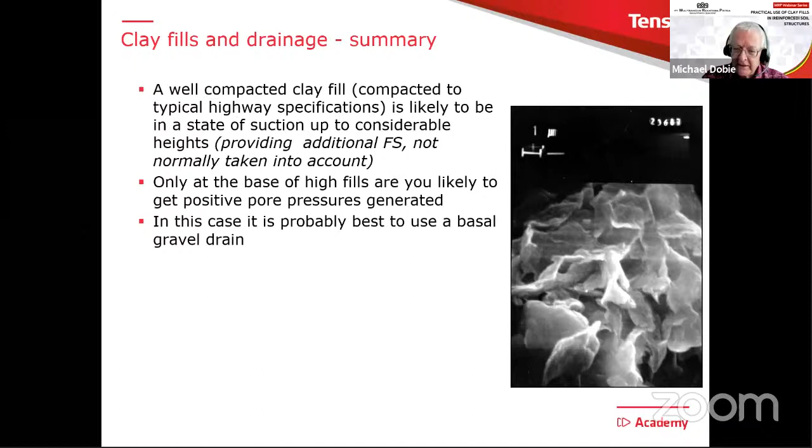Only for very high or high fills are you likely to generate positive pore pressures towards the bottom of the fill, as we saw earlier. In most cases, it's best to use a basal gravel drain, especially if you're in a situation where you might have high pore pressure towards the base of the fill. It's important that drainage measures should be arranged to avoid prolonged contact of the fill with free water.

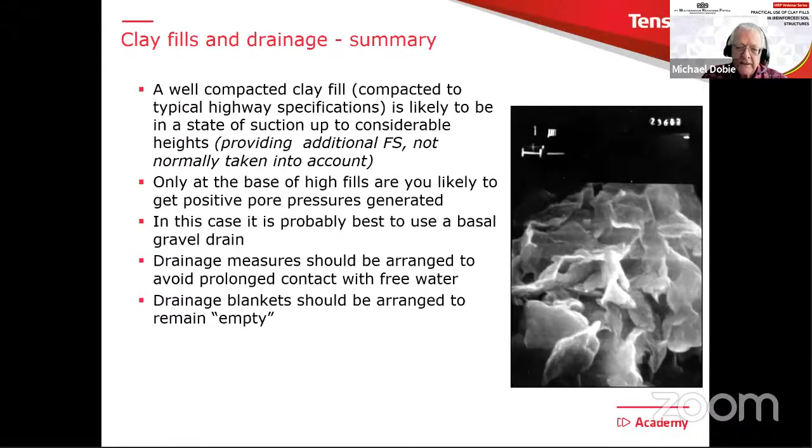Just remember Pat Clay and his requirement to avoid being in contact with free water. Drainage blankets should be arranged with crossfalls and located where they can essentially remain empty—in other words, water can easily run out of them. They shouldn't sit there providing a source of water to the clay nearby, like we saw just now with the Hill Hall failure.

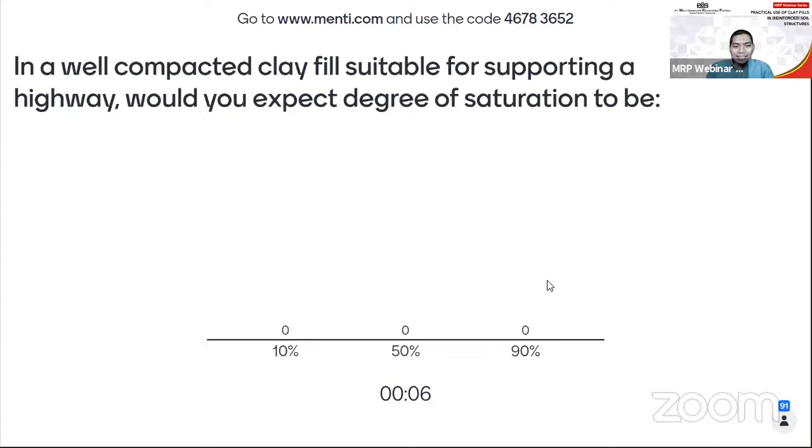Answer fast to get more points. In a well-compacted clay fill suitable for supporting a highway, would you expect degree of saturation to be A, 10%, B, 50%, or C, 90%? Kita tunggu 15 detik. Siapa yang cepat dan yang benar? Tidak hanya benar, tapi harus cepat. 5, 4, 3, 2, 1.

Ya, kita lihat. Jawaban yang benar adalah C, 90%. Ada 49 peserta yang menjawab dengan benar. Kita lihat leaderboard-nya, siapa yang menjawab benar dan paling cepat. Untuk pertanyaan pertama ini, yang paling benar dan paling cepat adalah Valdi Kosalim. Kita akan lanjutkan ke pertanyaan kedua, jawab dengan benar dan yang paling cepat.

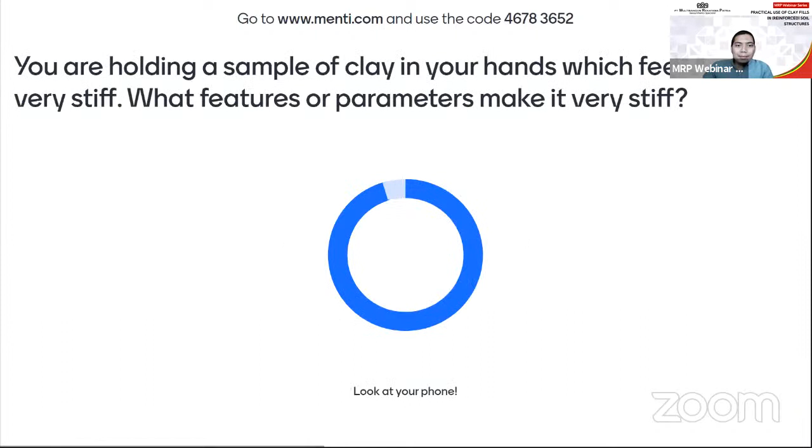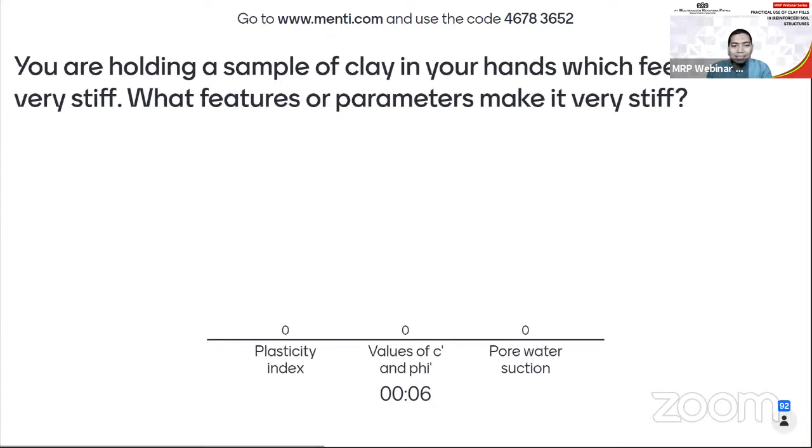Answer fast to get more points. You are holding a sample of clay in your hands which feels very stiff. What feature or parameters make it very stiff? A, plasticity index, B, values of C dash and phi dash, or C, pore water suction. Waktunya 10 detik lagi. 5, 4, 3, 2, 1.

Kita lihat jawaban yang benar adalah C, pore water suction. Yang jawab benar ada 27 peserta kuis. Kita lihat siapa yang benar dan paling cepat pada pertanyaan kedua ini. Masih dipegang oleh Valdi Kosalim.

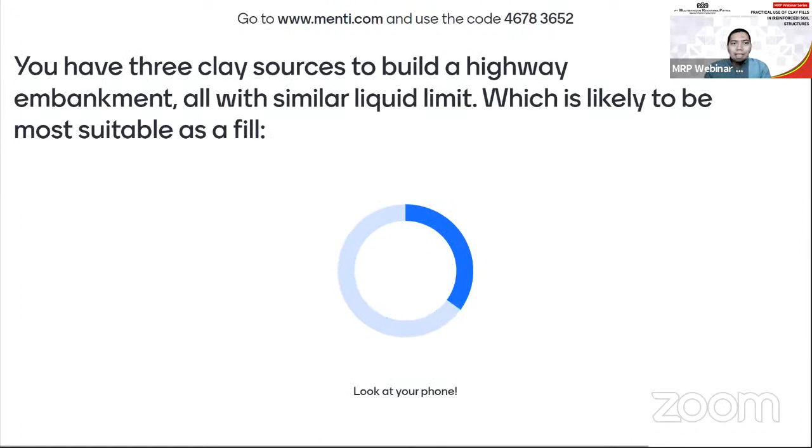Oke, kita lanjut ke pertanyaan ketiga. Masih ada kesempatan untuk pertanyaan ketiga ini. Answer fast to get more points. You have 3 clay sources to build a highway embankment, all with similar liquid limit, which is likely to be most suitable as fill. A, plots below the A line, B, plots on the A line, or C, plots above the A line. Waktunya 5 detik lagi. 4, 3, 2, 1.

Time is up. Kita lihat jawaban yang benar adalah plots below the A line. Kita lihat siapa yang memenangkan kuis hari ini. Untuk pemenangnya pada kuis hari ini adalah Valdi Kosalim dengan nilai 2.930 poin. Kemudian juara kedua Sri Kanti Wijayanti dan ketiga Hanif Audina Rahmawati. Selamat, panitia akan menghubungi pemenang.